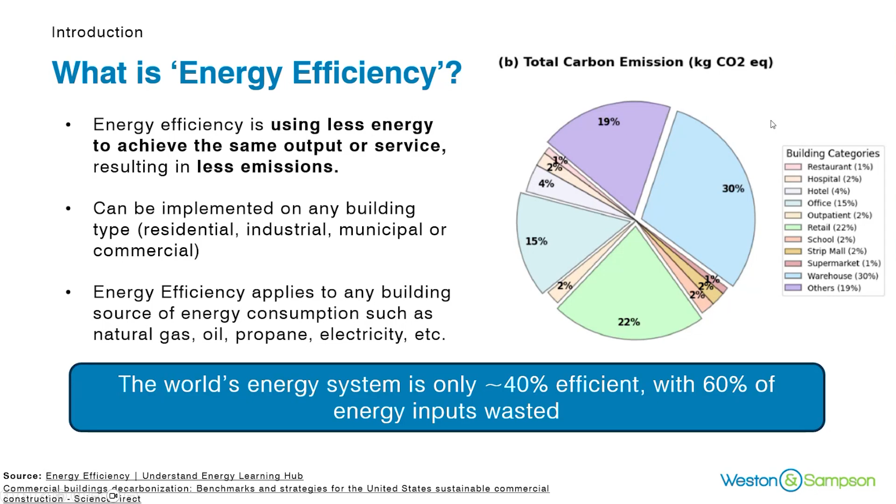All right, and we're seeing responses come through that indicate that your respective leaderships are somewhat supportive to very supportive. Okay, so that's great to know, and hopefully you'll be able to take away some facts from this webinar that can be used as discussion points for your various teams and leadership to help you accomplish even more that you may be interested in accomplishing.

All right, so moving on, I'm going to pass it over to Sam to talk about some of the benefits of energy efficiency projects. Okay, thank you, Robert. We saw your response as well. Noted. Thank you so much. All right, Sam, I'll let you take it from here.

All right, thanks, Joanna. So I'll talk about cost savings, one of the important benefits that we can get from energy efficiency. So a byproduct of energy efficiency or implementing energy efficient practices is reducing your monthly energy bills, whether that's electricity, natural gas, even water, making energy use more affordable for us all. Often there is a higher upfront cost, at least when we compare energy efficient practices to standard best practices. But cost savings do develop over time and lead to more efficient use of your energy over time.

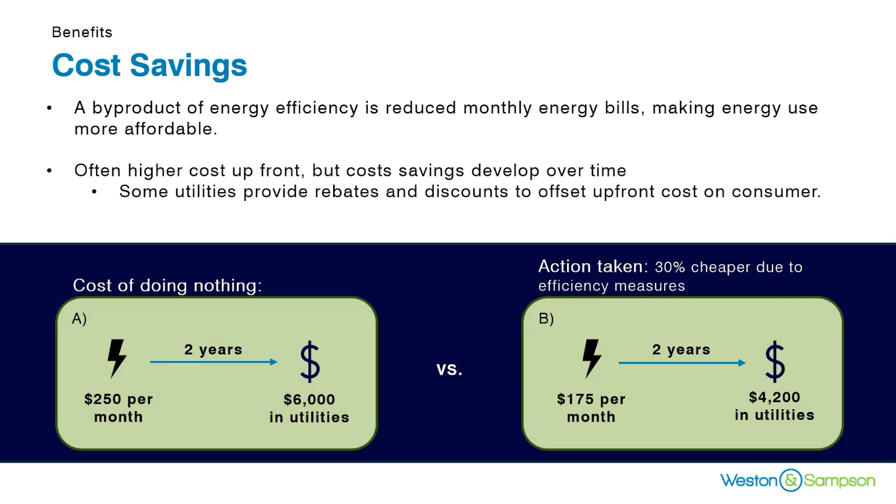So, environmental benefits. Some of the additional benefits, and sometimes even more focused than just the cost-effective or cost-efficient benefits of energy efficiency, is helping to reduce the environmental impacts of what we do on a daily basis. So energy efficiency projects can reduce your carbon footprint from doing things like lighting up your building or a space, or just heating things to comfortable temperatures.

All that uses energy and actually increases how much carbon emissions we produce as a consumer, homeowner, building owner, occupant, resident. And to society, our carbon footprint leads to air pollution. It could lead to water pollution, things like that. So by implementing energy efficient practices, this could reduce the amount of electricity generation that's needed at a power plant. That could reduce emissions, support clean energy and reduce smog in certain areas.

Less land use, in terms of how much power and electricity is being generated. It uses land to do that because we might be implementing a new expansion of a power plant or an expansion of a transmission line or something like that. So by reducing the impacts there, we can support biodiversity and protect our ecosystems because of the lesser land use.

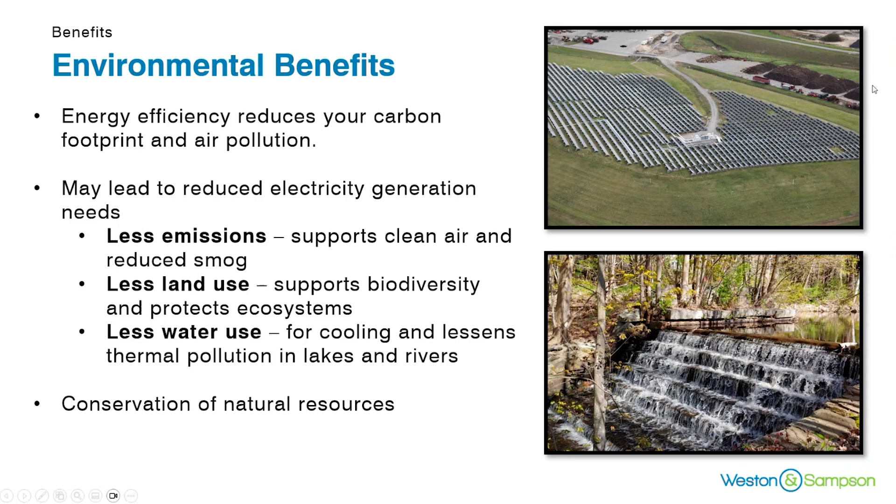And then on the water side, water is being used at power plants for electricity generation, for cooling the power plant and to run turbines and things like that. So we can reduce the heat pollution, which would be basically the heat that's going into our water bodies, our water systems in lakes and rivers, as a result of using energy locally. So by doing all this, we can conserve natural resources. Next slide.

There's also operational improvements, right? So at an industrial manufacturing facility or at a school or at a building where we have occupants that do things that need to be focused on some minute detail, there's operations that are involved with those activities. So energy efficiency allows for equipment to operate more optimally. The well-oiled machine, we like to call it.

So by allowing equipment to run more optimally, that could be your heating and cooling system. There could be less squeaky devices in like a fan system, there could be things that allow somebody on a process line to do their job more effectively. So those types of things will improve operationally what's going on in a building by doing energy efficient things.

And additionally, it can help expand an equipment's operational lifetime or lifespan and reduce the maintenance required. So in the example where you have an older filter or an older motor, that could lead to increased energy usage from less efficient equipment. Basically, that can also reduce the amount of maintenance they need to put on the equipment as well. So it's more in line with a preventative maintenance type of implementation.

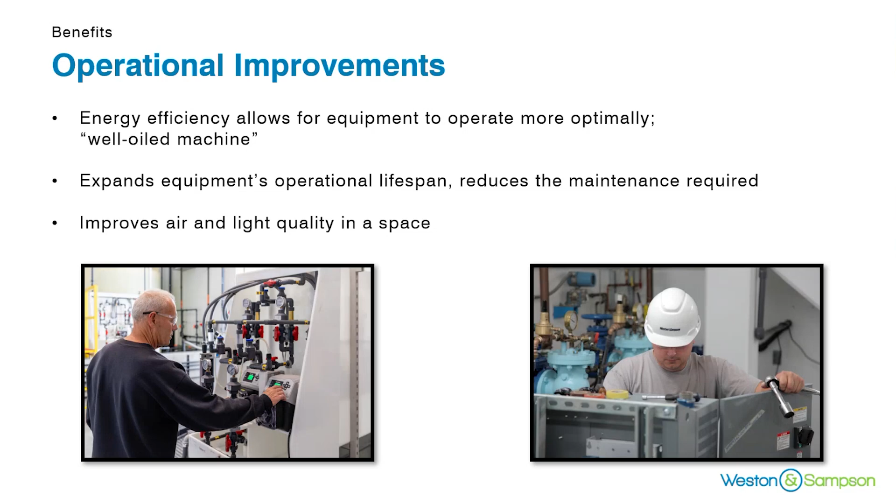And I think this is the last benefit one, but not the least important. There's also utility benefits associated with energy efficiency projects. So lowering the cost of utilities is obviously a direct consumer benefit, but that's also a benefit to the utilities too. You're increasing customer satisfaction. We're reducing the electricity peak demand or even the natural gas peak demand needs for distribution. And that will lower the amount of utility construction projects that need to be done, lowering costs to the consumer and lowering the needs for new power plants and new transmission lines.

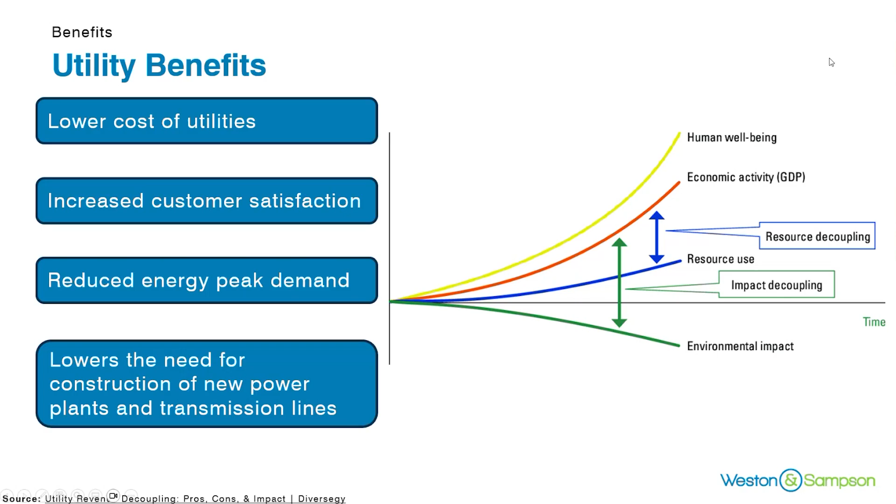Next slide. And I'll hand it back to Joanna for energy auditing.

Thanks, Sam. So next we're going to talk about one of the precursors to implementing energy efficiency measures, which is conducting an energy audit. So as we like to say, you can't reduce what you don't first measure. So the American Society of Heating, Refrigerating, and Air Conditioning Engineers, or ASHRAE, has a standard for conducting energy audits. There's 3 levels of energy audits that fall under the ASHRAE standards, level 1, 2, and 3, as described here.

You can also conduct a pre-level 1 audit, which we would call a benchmark or energy use analysis. So that's really the highest level, the least detailed, but this is a way to get your total building energy use accumulated and measured and calculated. There's a tool that's available by the US EPA called Energy Star Portfolio Manager. This is also a high level tool that can be used to compare your building's energy usage to similar buildings. Data is imported by building category, so you can just get a baseline sense of how your energy use compares to similar buildings.

Moving up the scale here, a level 1 energy audit is the more simplified audit compared to levels 2 and 3. This would include a walkthrough assessment of a building or facility where a qualified professional would identify the high-level potential for energy savings measures. So that would be based on a visual observation. A level 1 energy audit would include the qualitative assessment of energy efficiency measures, maybe some high-level calculations on cost savings as well.

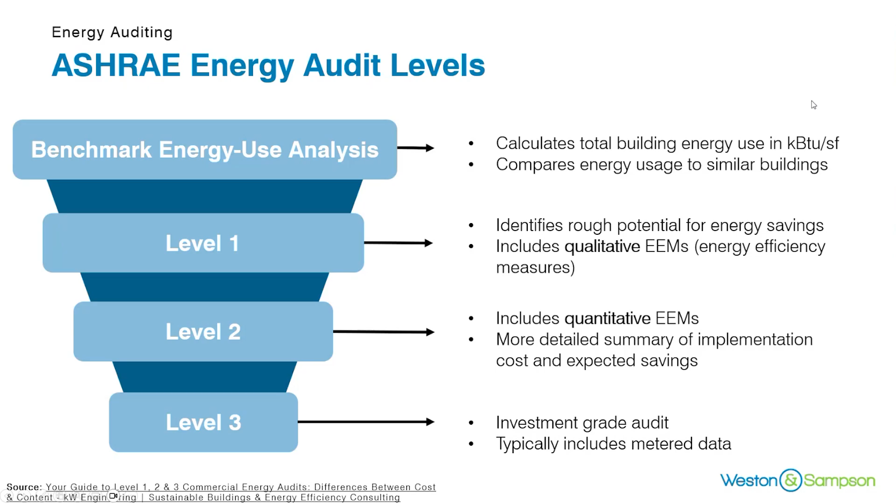The highest level of audit, level 3, is also known as an investment grade audit. So this would not only include a walkthrough and observations by a qualified professional, but it may also include metering actual equipment and gathering data for a number of weeks, up to a month, to get a really solid sense of how much energy is being consumed by particular equipment or devices. And then this would include the most detailed estimate of both energy savings, cost estimates for implementing measures, and expected cost savings. So depending on your needs, or where you are in your energy savings journey, one or more of these may be appropriate to have conducted at your facility to help inform future projects.

So talking about energy efficiency measures, they fall into different categories as well. The first one here is a no-cost measure, of which there actually are many, believe it or not. Every energy efficiency measure doesn't need to cost money. A no-cost measure is just that, a project that reduces energy with no significant associated cost. Examples of this can include operational measures, where maybe changing the time you use certain equipment in your building or facility would allow it to be operated during an off-peak time, so that there is no impact to your operations or production, but simply changing the time that you operate equipment can save you money on your electricity bill if you fall into an off-peak time.

Another example of a no-cost measure is energy efficient power strips that are often free or provided by some utility companies at no cost. So using the energy efficient power strips, automatically shutting devices off when they're not in use, can conserve energy, and that can be a no-cost measure that could save you on your electricity use and cost.

So moving up to the low-cost measures, it's projects that reduce energy with relatively small associated cost. We would put lighting in this category, upgrading to LED lighting, maybe replacing some small motors with more efficient motors. Those can be examples of relatively low-cost measures, changing out equipment or devices for more efficient devices that do have a cost associated with it, but should pay back over time through reduced energy usage.

Sure. So for project types, HVAC, which is heating, ventilation, and cooling. So our heating and ventilation cooling systems can be more efficient, but they do provide a large portion of our energy usage in commercial, in a lot of industrial buildings, municipal buildings as well. So increasing energy efficiency, as we spoke before, can lead to more reliable operation, increase indoor air quality, potentially extend equipment lifespan. So those are some important benefits of doing efficient things related to our HVAC systems.

So on the heating and cooling sides, typically this means implementing more efficient systems when we upgrade our systems. So this may be something that can be considered as buildings expand, or as you move into a new facility, or as you operate or change operations in a facility, looking into equipment that can or needs to be upgraded, for maintenance reasons, but look at it to see how can we be more efficient? How can we save energy, save costs, and save environmental emissions here? So those are some of the heating and cooling ways that you can upgrade.

Additionally, on the ventilation side, there's ways to implement heat recovery or energy recovery practices. So those are measures that can be done there. On the ventilation side, you can also do demand controlled ventilation. So let's say you have a building with a very high bay community room, or a gymnasium, or an auditorium, or some sort of high bay space that needs a lot of fresh air in that space.

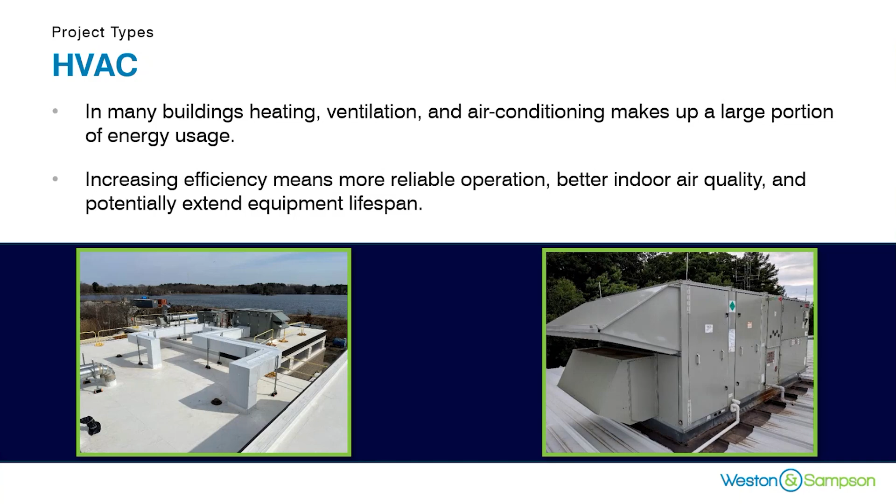So lighting. So lighting is our light fixtures, our light bulbs that are in our buildings, in our residences, and how can we make those more efficient? Typically this is one of the more cost-effective ways to implement energy efficiency projects. And that's typically because a lot of older buildings, a lot of municipal buildings, they'll have older light fixtures in certain locations. Maybe not every room, but if you've been upgrading over time or replacing light bulbs, you might be moving towards high efficient devices, but LEDs are likely the most efficient equipment type that you can implement nowadays. In addition, there's controls features.

So dimmers and motion switches, basically what that allows you to do is sense when the full 100% lighting is not needed. So if an area is next to a window or a skylight where you're getting a lot of ambient light coming in, you can reduce that energy usage or the light output from those artificial lights to help save energy when there's sufficient ambient light available. And then similarly, the dimmers allow for a more robust way to operate the individual light fixtures. And that can be also controlled through motion sensors.

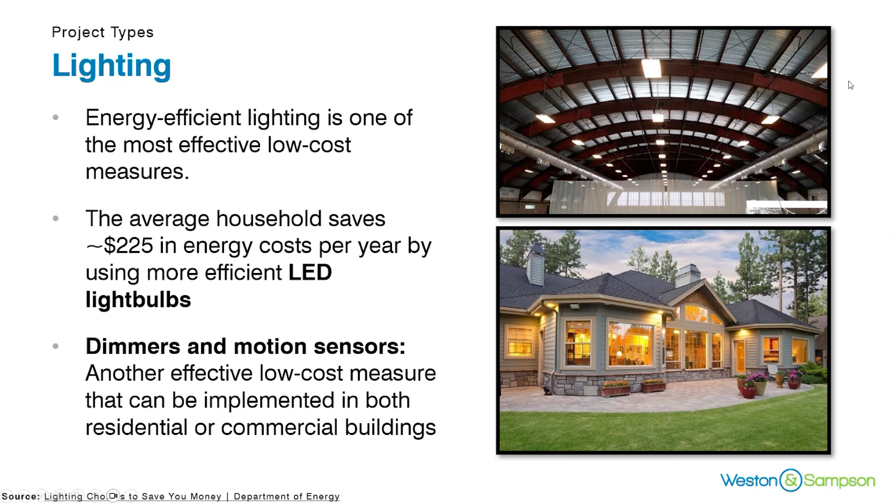All right, so building envelope. So this is a fun one. So the picture over here on the left is an infrared view of a building, right? So looking at this particular building, you can see the red areas are the warmer areas and the blue areas are the colder areas. So what this infrared camera picture is showing us is that there's leaks or there's drafts near the windows, right? Near crevices in the roof line, compared to the wall. So you can see that there's significant energy inefficiency in this building.

And to reduce the thermal energy loss from poorly sealed buildings, we can do certain things to make that more efficient. We can put better insulation into the walls, attics, roofs.

We can address drafty windows through either interior storms or adding caulk, putting in weather stripping along exterior doors. Exterior doors, a lot of them, may have had weather stripping or door sweeps, and a lot of them can degrade over time through use. So it's good to keep up on that and make sure that when you're inside a building looking out, you're not seeing the light of day where you're not supposed to.

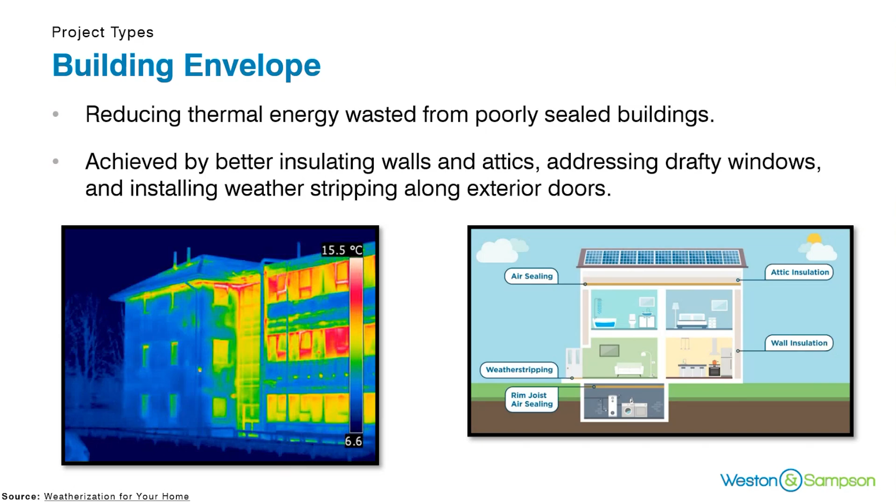So motors and pumps. Motors and pumps are a significant energy source at buildings like pump stations, treatment facilities; even offices use pumps and motors for ventilation or circulating hot water, cold water. But specifically in treatment facilities, electric motors consume a portion of the energy usage there, and also in industrial as well. On a global basis, 45% of global electricity use is from electric motors.

There are small efficiency gains that can be done from just replacing an older motor with a newer motor, upgrading the efficiency on it. Small efficiency gains through those replacements lead to long-term energy and cost savings. There's also more minute strategies to improve pump and motor efficiency through controls, right? So controls where you're not operating your motor or your pump as much as the capacity of the system could dictate.

So without a particular control like a variable speed drive or a variable frequency drive, we might be running this equipment at 100% all the time, even if we don't need it. So by controlling them more efficiently, and by making upgrades where we can, over time, our energy usage can dramatically decrease.

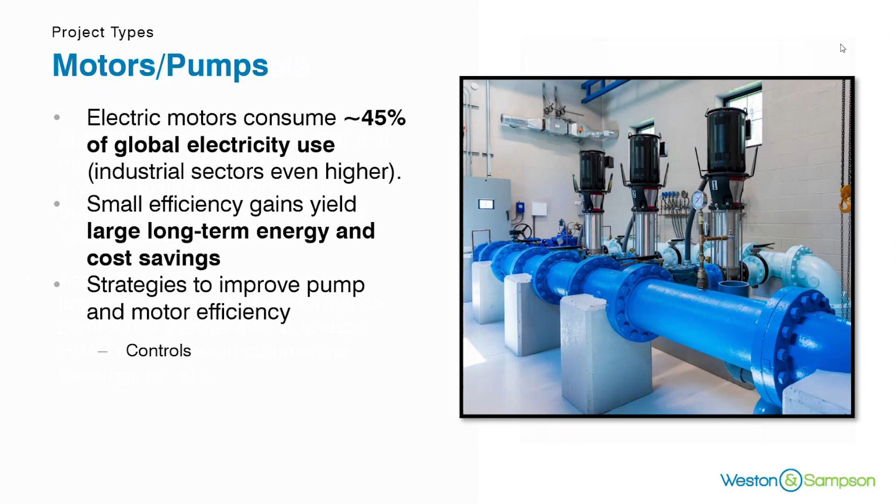Building controls. Building controls is primarily related to our HVAC systems, but can also be connected to other types of end uses and systems. An EMS or BMS is also called an energy management system or building management system. These control devices control and monitor the different energy systems in each space, and the different zones for your heating and cooling systems. This allows the heating system to communicate with the chiller system and other cooling systems and ventilation.

So you're controlling them all together so you can implement, at minimum, scheduling the systems so that they only run when needed. At most, you're implementing more efficient practices like outside air resets, sensing temperatures outside, sensing humidity in the space, looking into the lighting, what's being done there.

And sometimes if you're in a building like a hotel where you have people going in and out a lot, there's occupancy controls that can be in each space to define whether or not a space is occupied. Once the control determines if a space is occupied or not, it will in turn communicate with the control system, with the heating, cooling, and even lighting systems to turn off when not needed.

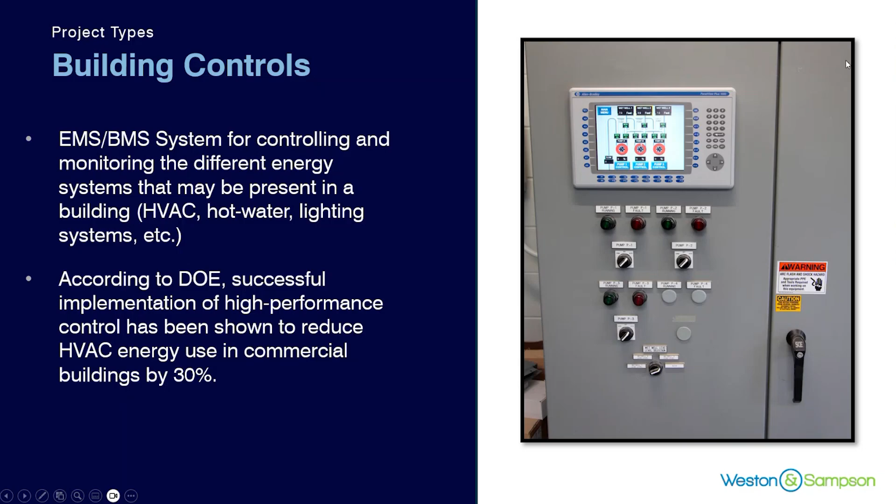Retrocommissioning. Retrocommissioning is a practice where we're looking at an older building. The building might not be 100 years old; it might have been constructed 10 years ago, for example. Even a new construction building might have been value engineered, or certain components downgraded during construction due to increases in costs. So we're talking about an older or inefficient building that is running as is, and we're providing it the necessary upgrades to increase energy efficiency.

The way we do that is through looking at the building management system, looking at sensors in a space, making sure that the control system is communicating properly with the equipment, making sure that the fans are running in the right direction, not the reverse direction, making sure that electrical wires are connected properly. So that's all part of retrocommissioning.

We can also look at the building envelope as a retrocommissioning measure, and we can see insulation that's been degraded or removed over time by a contractor that came in and did some upgrade in your attic. There might have been some insulation that was there that might have been stacked onto something else.